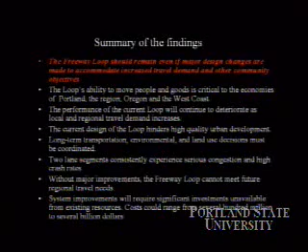At this point, I need only to remind you that there are major residential developments occurring around downtown that will by all likelihood result in increased job opportunities and increased residential demand. Given the fact that the loop handles not only regional travel but also local travel—as a matter of fact, the trips made on that loop that originate downtown and end in some of the surrounding neighborhoods is a very significant number—as those areas change, the pressure on the loop is likely to increase.

The current design of the loop hinders high-quality urban development. It serves as a barrier—in some cases a visual barrier, in other cases a functional barrier.

Long-term transportation, environmental, and land use decisions must be coordinated. That's another finding: when you deal with the future of the loop, you must pay attention to the land uses happening around that loop. There are many changes happening that now require us to coordinate between land use decisions and transportation decisions.

Two-lane segments consistently experience serious congestion and high crash rates. Another finding: without major improvements, the freeway loop cannot meet future regional travel needs, and that's a very important criterion to watch for. Finally, system improvements will require significant investments unavailable from existing resources. Costs would range from several hundred million to several billion dollars, depending on which alternative you consider for improvements.

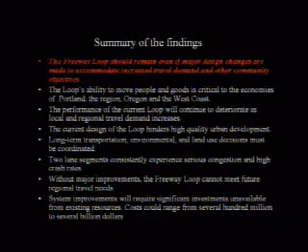We also came to the conclusion that if the future of the loop is to be addressed, the city, the state and the region need to ask several questions. The first question is how can we develop a transportation system that meets the needs for efficient movement, strong urban form—and here I'm stressing strong urban form because of all the developments occurring around the loop—vibrant waterfront districts, livable neighborhoods, and a healthy economy. At many points these appear to be contradictory to each other, so it's very important for us to balance between the issues related to all of these.

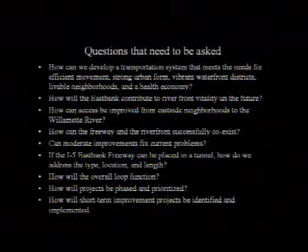How will the East Bank contribute to riverfront vitality in the future? This is again something that has consistently been raised since the 1980s. After the development that occurred on the west side of the river, improvements on the east side have become a major concern. There have been several attempts to examine the future of the East Bank Freeway, and all of them focus on the need to open the river to the east side neighborhoods.

How can the freeway and the riverfront successfully coexist? Can moderate improvements fix current problems? Given the lack of resources, those sometimes tend to be the most viable alternatives that we have. If the I-5 East Bank Freeway can be placed in a tunnel, how do we address the type, location, length, and I should add also the enormous cost?

How will the overall loop function? How will projects be phased and prioritized? Should we decide on gradual improvements? How are they to be selected and how are they to be phased? How will short-term improvement projects be identified and implemented?

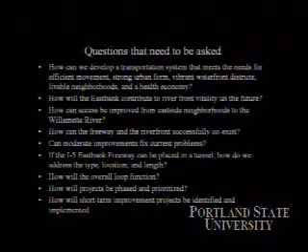How can freeway loop traffic, environmental, and design studies be completed, including early focused work on the congested bottlenecks at the I-5, I-84 interchange? That is, again, an aspect of the freeway that is very significant to a number of businesses in the community, and it's a very important concern.

Which project will be built first? How will this be funded? How can we start jumpstarting any projects that we recommend? So there are a number of questions that were raised. Actually, the group that worked on the loop raised more questions perhaps than provided any answers. And if you are expecting that at the end of my presentation I will be telling you a solution that has come out of this group, we did not come with any specific solution.

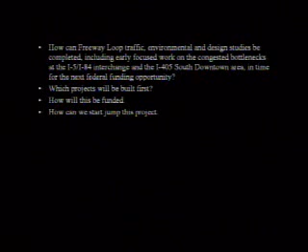However, we believe that we have made some significant contributions to understanding what are the issues facing the loop, facing the city and the region. We made some specific recommendations in terms of future actions that need to be taken.

The first of them is to start planning now for short and long-term improvements. I'm saying short-term and long-term because sometimes it's extremely difficult to determine, if you have a scenario that is very long-term, how can you work toward that if the short-term improvements will actually be in conflict with what you are doing.

That has always been a dilemma for us in the group, and so there is a need for coordinating the short-term and long-term solutions: find funding for the next phase. The next phase we are recommending is appointing a committee and starting a process for the development of a master plan that identifies future steps and future measures that need to be taken.

To move the project forward, we are recommending the initiation of a master plan, advancing ongoing priority projects, and completing the master plan before any major investments are made. So in essence, our hope is that a master plan could be developed sometime within the next couple of years.

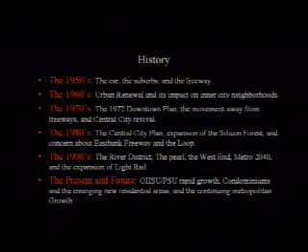But the loop wasn't completed until sometime in the 1970s, when the Fremont Bridge was completed. So in essence, as the loop was being gradually built, things were also happening around it.

In the 1960s came the age of urban renewal, which in many cities—luckily not ours—actually demolished the downtowns, and you can still see the negative impacts of urban renewal in many downtowns today. In our case, we were fortunate that urban renewal was only applied to a small part of downtown. Interestingly, it's the part we're sitting in now. To the east we have the Portland Center, to the west was Portland State. Portland State University is an urban renewal project.

But urban renewal resulted in major changes and began to contribute to changing public perceptions of what's happening downtown. Then came the 1970s, and for us in Portland, the 1970s were very exciting years.

That's when in 1972 the downtown plan was developed, along with a growing resentment against the freeways and a movement away from them in many ways. In 1973-74 we demolished a freeway—we are one of, if not the first city in the country to demolish a functioning freeway. That's the Harbor Drive Freeway, which was replaced by Tom McCall Park.

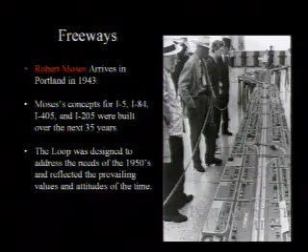So going back to the freeways, it started with Robert Moses, who arrived in town in 1943. His ideas for I-5, I-84, and I-405 were built over the next 35 years. The loop was designed to address the needs of the 50s and reflected the prevailing values and attitudes of the time. But what existed before the freeways?

Portland actually had a fairly well-developed arterial system that was sufficient for a population of less than 1 million people. Obviously nobody would argue it would have been sufficient for today's population, but that was the situation prior to the loop. If you look at the map to the right, you realize that when the loop was built, it cut into neighborhoods—not only separating them, but basically making many of them inaccessible.

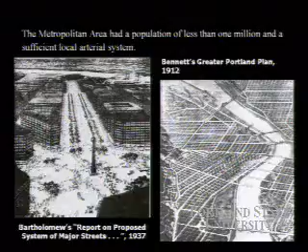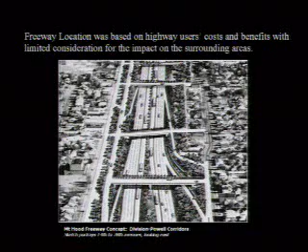In its current form, the loop remains a visual and functional barrier in many of its segments. The significance of the visual barrier is already beginning to be felt if you notice the developments occurring in the South Waterfront area, and how the freeway and the Marquam Bridge actually cut them visually from the rest of the downtown. So the freeway loop is a very significant barrier, but given everything I've said about its significance and importance for the economy, the future is going to be trade-offs between how you can balance the two considerations.

At the same time, in the 1970s, as a result of the 1972 plan, we became very much concerned about quality spaces, and that was reflected in the kind of development we did downtown. The Pioneer Square was developed, and it excited the imaginations of what other improvements could follow. The Transit Mall was also built in the 1980s, completed in the early 80s. The city was moving in a direction focusing on the quality of spaces for public gatherings and public enjoyment.

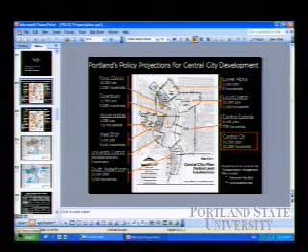The first thing we engaged in is understanding Portland policy projections. We examined the potential for growth of household and employment in the city. So we examined the various areas of the downtown neighborhoods, and we identified the potential growth.

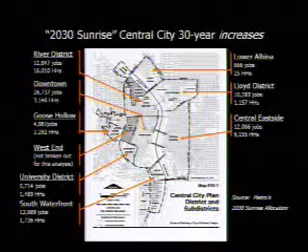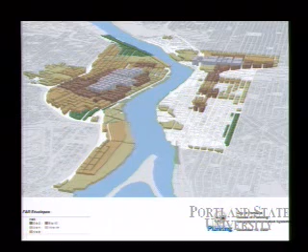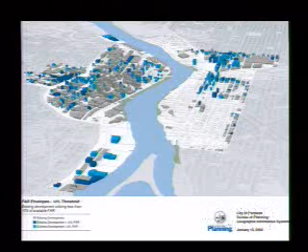At the same time, we did take Metro's Sunrise employment data. So in essence, we used two sets of information taken from the policy projections of the city of Portland and information taken from Metro. We also relied on some analysis conducted by the late Graham Clark regarding space allocation, the space potential for growth and redevelopment in the downtown and surrounding areas. So the kind of analysis conducted by the staff are very extensive, elaborating on the potential that exists around the loop.

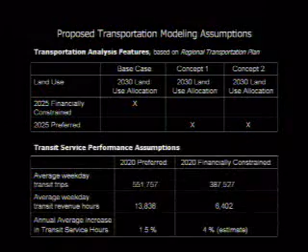We did our modeling based on two assumptions, based on what kind of investments will be available for improving transportation in the region. One relied on a constrained investments assumption that will result only in new light rail going to Milwaukie and Clackamas. The aerial tram will be built for OHSU, the Portland streetcar to the south, the interstate bridge capacity unchanged, and the Sunrise corridor to southeast 122nd.

We had another assumption based on a preferred system that entailed greater investments in light rail to Vancouver, bus rapid transit on Barber, interstate bridge additional lanes, and Sunrise corridor to US 26.

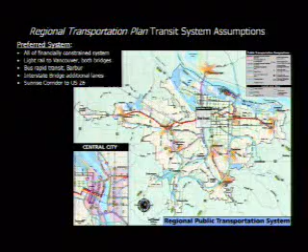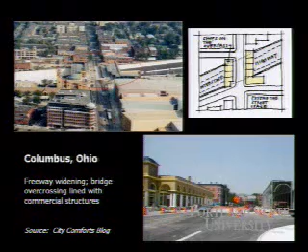At the same time, we examined the experiences of other cities in dealing with the freeways they have. Columbus, Ohio had a very interesting situation where they used the bridges over the freeway, expanded them, and created commercial space over the freeway. They didn't cover the freeway completely the same way Mayor Katz wanted for the I-405, but they did make modifications by creating commercial activities so the streets aren't interrupted and the freeway's impact becomes minimized.

Duluth, Minnesota, where a new park and several new cuts and cover tunnels actually were built in the city. You can see the picture itself.

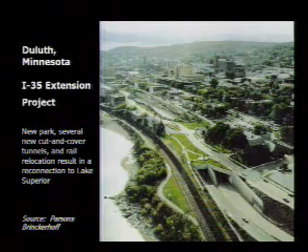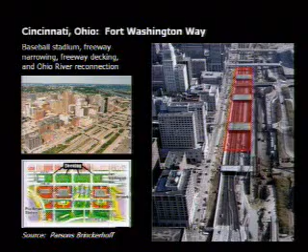Cincinnati did the same thing. They have a stadium, they have actually the freeway covered in some areas, and a park. Again, development, recreational developments were created over it.

Hartford, Connecticut, connected the river. Actually, they basically had a situation similar to the one that we have on the East Bank, and what they did is that they covered over that area in order to provide sloping access to the river, so you go over the freeway, and that's a situation that I'm not sure is 100% applicable to what we have here.

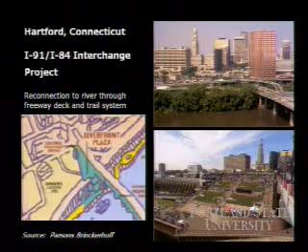But again, we did examine what other cities have done in similar situations to what we have.

The famous Embarcadero Freeway in San Francisco was demolished, and I would like actually just as a kick to our colleagues from San Francisco to say that we did remove our Harbor Drive Freeway before San Francisco removed the Embarcadero. So in essence, we have a better record on that account.

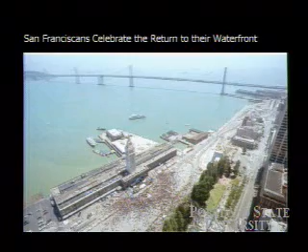But they removed the freeway to the south in San Francisco, and obviously the one example that we examined, and I have to say has weighed very heavily on our minds in the working of this group, has been the Boston experience.

And the reason I'm saying it has weighed very heavily on us is that all of you are aware that was a project to tunnel a freeway in the waterfront in Boston that started as an investment of $3 billion, and thanks to the former Speaker of the House from Boston, it kept growing, and I think is not yet completed, and it's already up to $11 or $12 billion.

So in essence, every time we talked about major investments happening here, we had to keep in mind that similar experiences actually led to situations that were unmanageable.

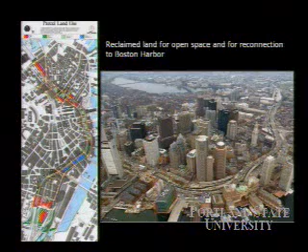And in essence, the Boston experience was a sobering experience for many of us who, on that group, would have liked to push aggressively for a long tunnel down.

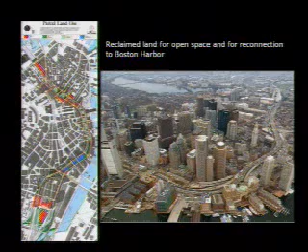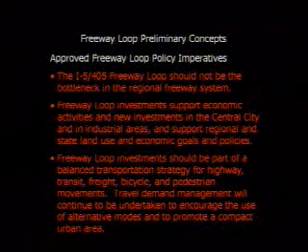So in essence, the one thing I'll have to say about this group is that we were not out there to try to come with solutions that are not implementable. We were very much concerned about realistic scenarios that will satisfy as much as possible all the objectives that we have for the study.

We started the work on this group, and as I said, the group consisted of 24 individuals representing various interests in the community that relate to the future of the freeway and the loop. And to some extent, the group was fairly balanced between those who felt very strongly about the need for something very drastic, visionary changes to the loop, either tunneling it or removing it, and others who have concerns about the viability of the loop as an important transportation link for trucking and for regional travel.

So when we started, we decided that it will be important for us, before we go into examining alternatives and examining scenarios that could be divisive in the way they are being presented, to have the group reach an agreement on three basic principles.

You call them policy imperatives. They were in reality principles that we had the group agree on, so that those principles will guide everything that we do later. So in essence, those principles were adopted very, very early in the process of the work of the group.

And the first one of them is that the I-5/405 freeway loop should not be the bottleneck in the regional freeway system. So in essence, the freeway loop has to continuously be improved or maintained on whatever design done to it, to make sure that it is not a bottleneck impacting the entire region.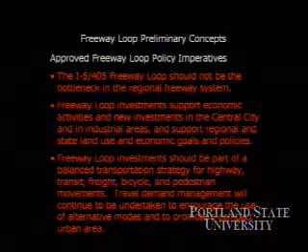I see two of my colleagues who worked with us in this group are here with us. They can testify to the fact that these principles were very, very important because they made everybody who has different views on things feel at least that part or aspects of their views are being accounted for in the work of the group.

We came up with a number of concepts in the early stages of the development of the alternatives, and we came up with 6 alternatives. Some of them may appear far-fetched, but at that time we weren't interested in what is practical and what is not.

We were interested in identifying for the group all the possible scenarios that can occur. So the first scenario, it's not exactly a no planning scenario, a do nothing scenario - that modest improvement is actually a do something scenario, but fairly modest. Basically it retains the existing system alignment the same with limited improvements throughout.

Braided ramps in the Rose Quarter area separating Broadway Weidler from I-84, the freeway caps over I-405, and the East Bank freeways. Again, that was a modest contribution by the group to some of the concerns being raised about accessibility and visual impacts that existed.

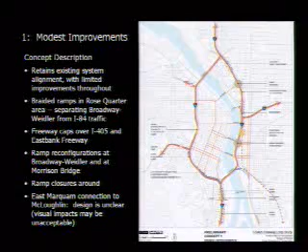Ramp reconfigurations at Broadway, ramp closures around East Marquam connection to McLaughlin - and I'd like to say that in all the various task forces I served on in the past, including one dealing with the East Bank Freeway, the McLoughlin connection has always been a very contentious, very significant demand by the Central East Side Industrial Council and the industrial development there. So in essence, this scenario will accommodate it.

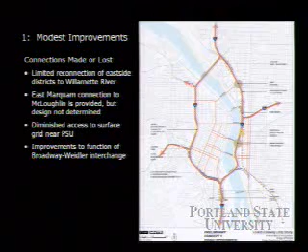Connections made or lost as a result of this scenario: limited reconnection of the east side districts to the Willamette River, which means those concerned about opening the river to the neighborhoods will not get much satisfaction from this scenario. East Marquam connection to McLaughlin is provided, but design not determined - we did not deal with any design issues in the work of this group. Diminished access to the surface grid near Portland State, and improvements to the function of the Broadway Weidler interchange.

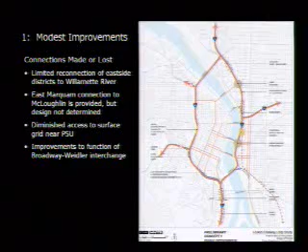So there were some improvements. There were also some issues that will not be addressed.

The second scenario was one of what I'll call the extreme scenarios, that were being discussed at one point in town - the scenario of taking I-5 and channeling it through I-405. In essence I-405 becomes I-5, and the freeway on the east disappears. So I-5 north connects directly to I-84, I-5 south connects to I-405, and it's replaced on the east side by surface streets.

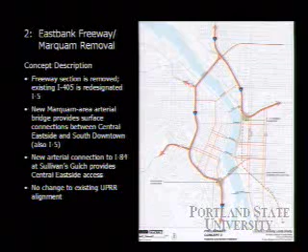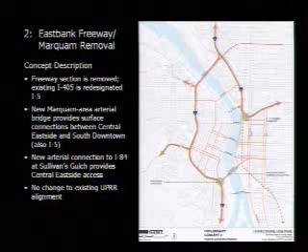Concept description: the freeway section is removed. Existing I-405 is, as I said, redesignated as I-5. The Marquam Bridge no longer serves as a freeway, so technically it can serve as a local arterial street connecting the central east side to South Downtown. New arterial connection to I-84 at Sullivan Gulch provides central east side access, with no change to the existing Union Pacific Railroad alignment.

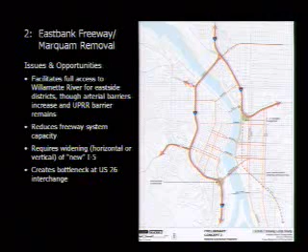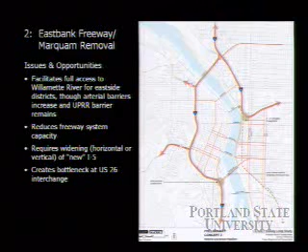Opportunities and issues raised here: it facilitates full access to the Willamette River - that's the scenario that would have opened the entire east side to the river. Although the railroad will still remain a barrier since it's a functioning railroad, and there was no recommendation in this scenario to remove it. It reduces freeway system capacity significantly and requires widening, horizontally or vertically, the new I-5 - meaning I-405 would have had to be widened, which would have been a significant investment. It creates bottlenecks at the US 26 interchange.

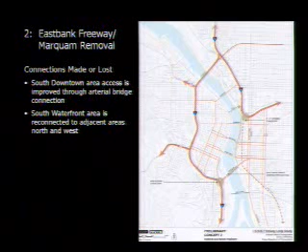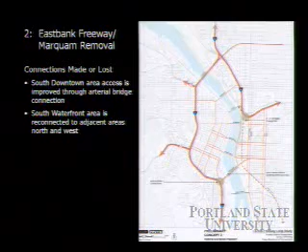Connections made or lost: South Downtown area access is improved through the arterial bridge connection. The South Waterfront area is reconnected to adjacent areas north and west, because all that spaghetti leading to the Marquam Bridge would have disappeared. So in essence, there are some improvements on the land use side, but there are some potential serious problems on the transportation side.

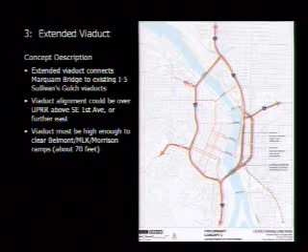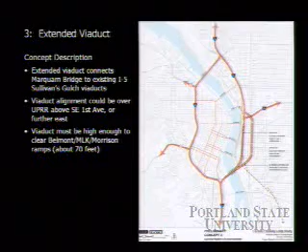A third scenario dealt with an extended viaduct. We're talking about two alternative locations here, and we did not select any one location. As you can notice, there are two alternative locations. The freeway would be raised even higher than its existing level, and by raising it higher up, you actually make ground connection to the river under the freeway.

The viaduct alignment could actually be over the Union Pacific Railroad, so to the extent you can address the future of the two together. But we did realize the viaduct would have to be very high to clear Belmont, Martin Luther King, and Morrison ramps, meaning the viaduct would have to be more than 70 feet high.

That's very significant. You may be opening the surface connection on the east side, but in reality what you'll be doing is putting that freeway in the sightline of Mount Hood or other visuals. So in essence, that's the third scenario.

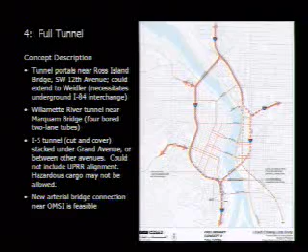But it could also, if you couple it with improvements on the surface, create new arterial connections between the east and the west, reducing the volume of local traffic that uses the loop. A scenario like this requires not only building a tunnel, but also making major improvements to the surface traffic that is crossing.

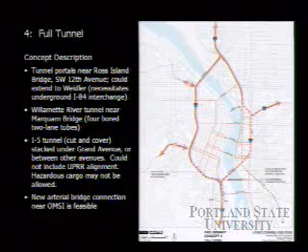As I said, it's very significant for removing the barriers that you face. Its major significance is the disruption it can cause to the town during construction, and as I'll come back to later, the cost of it. The cost is obviously very significant.

But it solves problems. It allows direct access from the Ross Island Bridge to the west. It opens back the neighborhoods that the loop separated back in the 1950s, in the sense that the South Portland areas, CTLH—that's Corbett, Terwilliger, Lair Hill neighborhood—could become reconnected to downtown, and may remove existing barriers between the Rose Quarter and the rest of the Lloyd District.

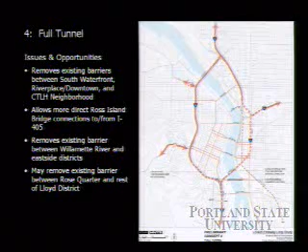So in essence, there are significant improvements, assuming that the resources to do a scenario like this are available, and we know that the resources are not.

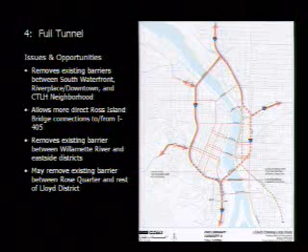There are also some connections that could be lost as a result of a tunnel like this. The I-5 Morrison Bridge connection to the central east side and downtown would be lost.

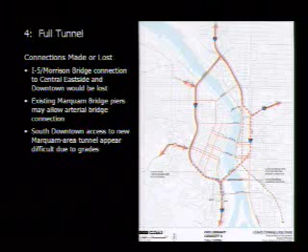There are very significant limitations to how many on/off ramps you can make through a tunnel, even though I have seen tunnels that have on and off situations—Montreal has a 3-mile tunnel with on and off ramps—but it's not constrained the same way this tunnel will be. So in essence, there are limitations.

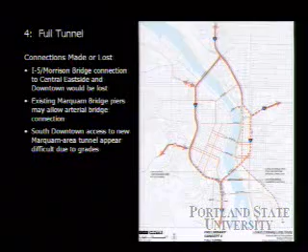Existing Marquam Bridge piers may allow an arterial if you lower that bridge and still use the existing piers. You could have a new bridge there more easily.

South downtown access to the new Marquam-area tunnel appears difficult due to grades, which basically means that those of us who work in this part of downtown and take the loop to reach the Lloyd Center may find that scenario unavailable if you have a tunnel situation.

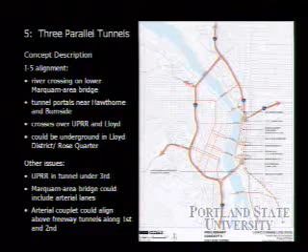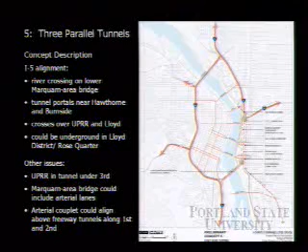We also examined another alternative which would have solved the problems of visual access on the east side, but not necessarily the visual access in the south waterfront area. That's crossing or lowering the Marquam Bridge and going into three tunnels. This scenario would have also addressed the railroad situation as a barrier, and many of the connection problems that the long tunnel does not address could actually be addressed with three different tunnels on the east.

We did examine all these implications. There are a number of issues: I-5 hits grade at Hawthorne, and if the existing viaduct was removed, the freeway could need to cross above it. The 3rd Avenue rail tunnel likely requires pumps to overcome drainage issues. So there are problems of infrastructure - the tunnel would require monitoring and special drainage containment systems. As for connections made or lost, the McLoughlin connection to I-5 appears doable near OMSI.

But we didn't stop on improvements that require different constructions. We also examined one alternative scenario for the loop that actually didn't occur to me - I never thought of it until the consultant and staff working on this came up with the idea. In many ways, if you think about it, it makes some sense, though it creates significant problems for people living on the south. That idea is to turn the loop into a one-way direction.

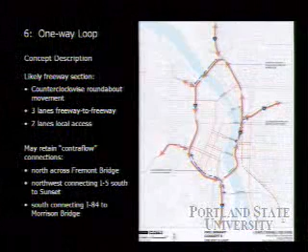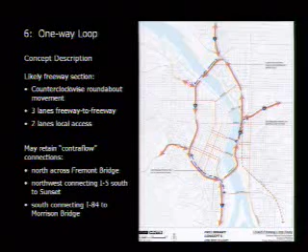It was a very interesting idea, but we did not make any major decisions as to which of these alternatives should be selected. Instead, we made decisions as to which alternatives should move forward for further study. As I said when I started my presentation, we did not intend, and did not make, any recommendation saying here is the scenario that should be chosen.

There was a previous similar group created by Charlie Hales and the City Council, back in 1991 or '92 I believe, and I served on that group. That group came with one single specific solution recommendation to the City Council. It didn't pass City Council, but that solution was actually for removal of the East Bank and building a tunnel further to the east of where it's located now. This group did not choose to go in that direction.

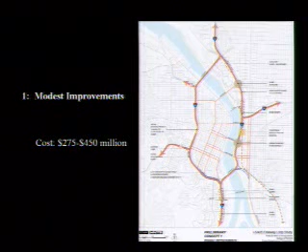We are not making any specific recommendations. The reason is that we didn't feel we truly have all the technical know-how or resources to conduct the kind of work and analysis required to justify going with a very drastic solution like the tunnel, or a modest solution like the modest improvements.

Instead, we selected three alternatives. The group felt fairly comfortable going forward in front of the City Council with those alternatives. In reality, the alternatives are not even binding on any of the future players who will prepare the master plan. So in essence, those alternatives are being presented as illustrations of the kind of things that a future task force or study on preparing a master plan for the system can address. We are providing some groundwork for the next step.

We selected three of the six. The first one was the modest improvements. As you'll notice, the attractiveness of the modest improvements is that we estimated its cost to be somewhere between $275 and $450 million, in 2003 dollars. So it's within the realm of previous investments we have done on the loop or on I-5.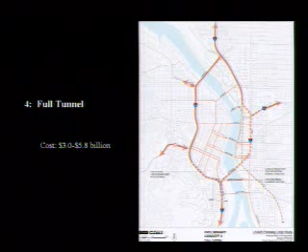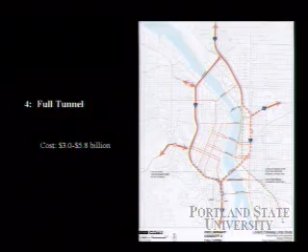There are significant interests in this community in covering the freeway or tunneling it or whatever. So in essence, we're not presenting it as a scenario that cannot happen, or that is too radical to happen. But we are presenting it with its realistic drawbacks and costs. The cost is somewhere between $3 to $6 billion, in 2003 dollars. That's a fairly expensive scenario.

The third scenario that we pushed forward was the one-way loop, at a cost of about $450 million. Now, why did we select these scenarios, and what did we do with them?

We obviously chose not to do detailed modeling on all six scenarios. So in essence, for the three that were selected, we carried out slightly more elaborate modeling analysis and studies to understand their implications. We did not invest the same time on the other three alternatives that we ruled out.

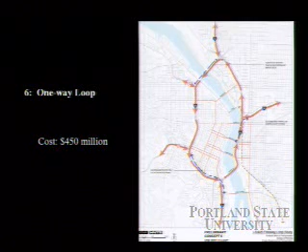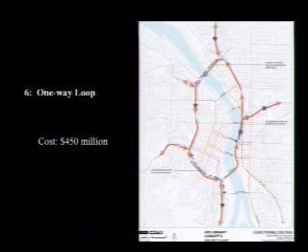So in essence, that is basically what the task force or the group has worked on. It was a fairly educational process for all of us who engaged in it.

Before I conclude, I'll just say that I believe the report that will be presented to the City Council at one point, hopefully within the next couple of months, is a very significant document. It attests to the quality of the staff work that went into it, and to the commitment of the 24 members of that group.

Did discussions get heated at times? Yes, the discussions were heated. Did I, as chair, come close to raising my hand and giving up at one point? Yes, I did. But I'll tell you, I never regretted being involved in this process. I learned a great deal from it, and I believe the group is to be commended for having presented to the city some realistic alternatives.

To understand what the role of that loop is and what should be happening to it in the future. It's a very significant transportation link, and I'm not sure that just pretending that as long as it's functioning we don't need to do anything about its future, I think that would be very reckless of us.